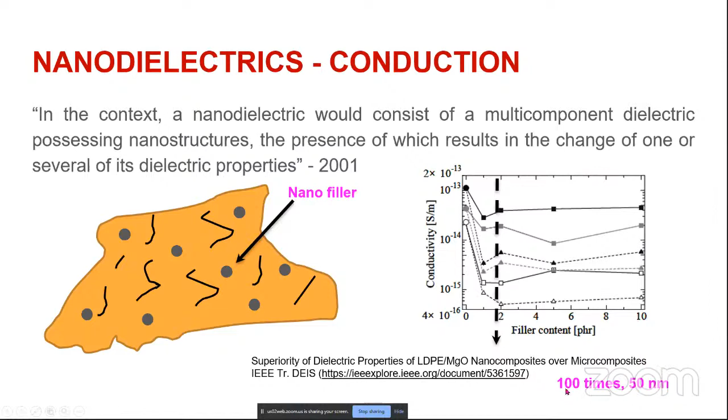As we all know, nanodielectrics have improved performance. For example, conduction is given here. With MgO nano filler of 50 nanometers diameter, around 100 times improvement is observed in the conductivity.

Also, as per the breakdown, around 10 times improvement is observed in the breakdown. Of course, the relation, 100 times in conductivity, 10 times in breakdown, is as per the thermal breakdown mechanism. In DC, the mechanism of breakdown is believed to be thermal in nature.

So both of these are initial performances, meaning when we are developing a nano material, it's not long-term performance. Initially, when we develop the nanocomposite, on that day, during that time, the performance has shown improvement in conduction and also in breakdown. Apart from these, several other properties improved with the nanofiller.

Tree inception voltage, impulse breakdown strength, partial discharge inception — but all these performances or improvements in properties are initial, meaning not after aging. So how it ages is very, very important, because if it ages faster... for example, this is the initial performance, so at time t equal to 0, nano dielectric is having higher breakdown voltage.

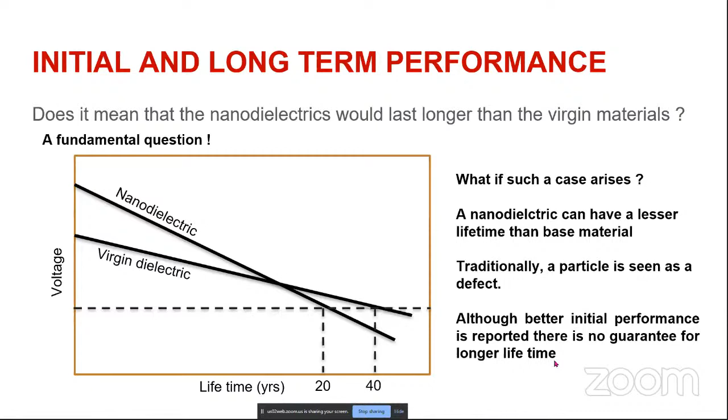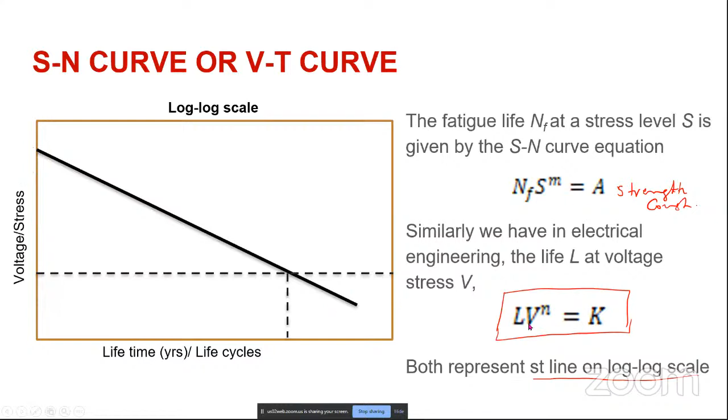Similarly, we have the electric VT characteristic, exactly similar. Both represent a straight line on a log-log scale. All engineers working in high voltage or dielectrics are expected to know this already. So here, this is the operating stress. At operating stress, we expect a longer life, minimum 20 to 30 years. This is the initial stress at which the breakdown strength is normally high, and this curve indicates LV to the power of n equals K, or NF into S to the power of M equals A.

So conventionally, how do we find this curve experimentally? We have long-term aging experiments. Traditionally we have to apply a particular voltage level V1, and it should not be too high.

What happens if it is high? In the initial period, the slope need not actually reflect the actual aging at operating stress level. Therefore, normally we have to decide a stress which is lesser than the initial breakdown voltage. But at a particular voltage V1, it's very difficult to decide which level we have to conduct this test at.

If the stress is very low, on this logarithmic scale, the times will be very huge. Some of the samples may not break at all. My experience also shows that it is very critical to decide at which field we will conduct this constant voltage test.

So here a particular constant voltage V1 is applied, and the test is continued for several samples. We can conduct it simultaneously also, but there are issues when we conduct simultaneously, because breakdown in one sample may initiate due to overvoltage during that breakdown.

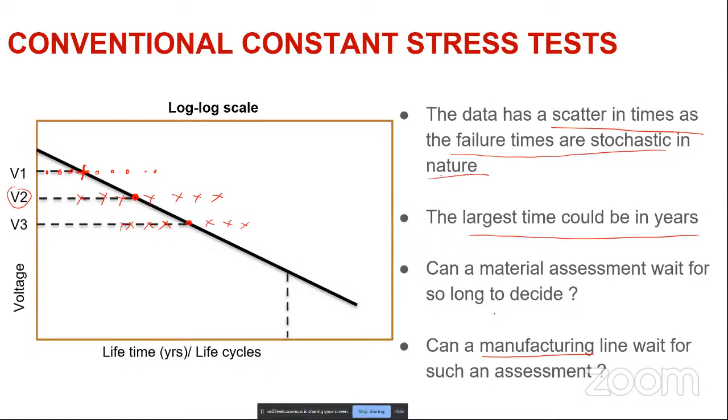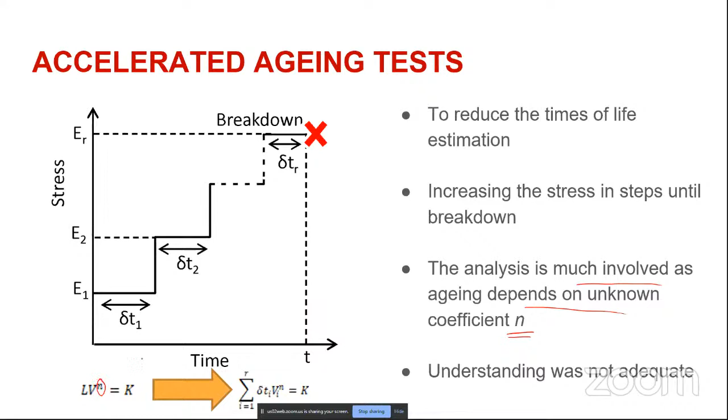So the main target is to estimate this coefficient n, which decides the aging characteristic. So then, how do we do it?

Conventionally, damage is defined in mechanical engineering as per Miner's linear damage accumulation rule, or Palmgren-Miner's rule. The fatigue damage accumulation D is expressed as D equals N-naught divided by NF, where N-naught is the number of cycles elapsed until that particular point of time, and NF is the life under that stress — the number of cycles for complete life under that stress. This precisely represents a relative elapsed life, defined as damage because the stress at which it occurs is not included. Each stress will have a different number of cycles, NFi — for example, if multiple stresses are applied, NFi differs for each stress. So what D gives in this definition is relative elapsed life, disregarding the stress involved — in other words, it's per unit elapsed life with units of time. This is the traditional or conventional definition of damage in mechanical engineering.

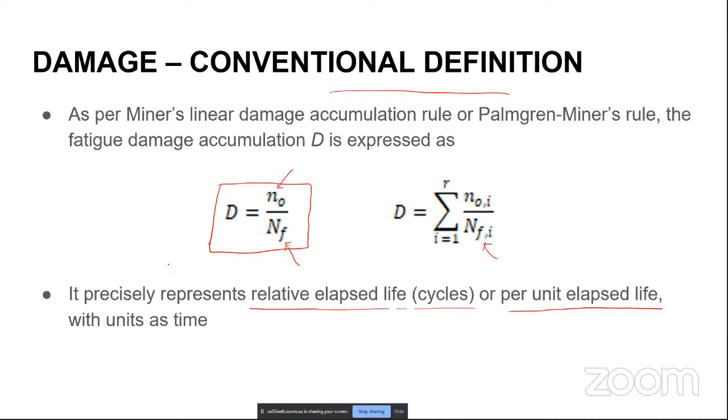Now, a similar definition can be applied in electrical engineering, but what we did is a little different. Damage is redefined here — it is reasonable to assume that damage is a function not only of the time of application of a stress, but also of the magnitude of the stress.

Damage is proportional to N naught, the number of cycles it is stressed, and the stress S to the power of m. So damage is defined as D equals N naught S to the power of m by A, where A is the strength constant.

So what is this actually? Instead of elapsed life, this is per unit elapsed strength. Instead of per unit elapsed life, it is per unit elapsed strength. Even further simplification is possible because A is a constant for a given material, so we can ignore dividing by this coefficient or this number. So damage now represents elapsed strength rather than elapsed life.

So alternately, if we ignore A, we can even define D as N naught S to the power of m. The electrical counterpart, we defined it as DC is sum of delta Ti into Vi to the power of n.

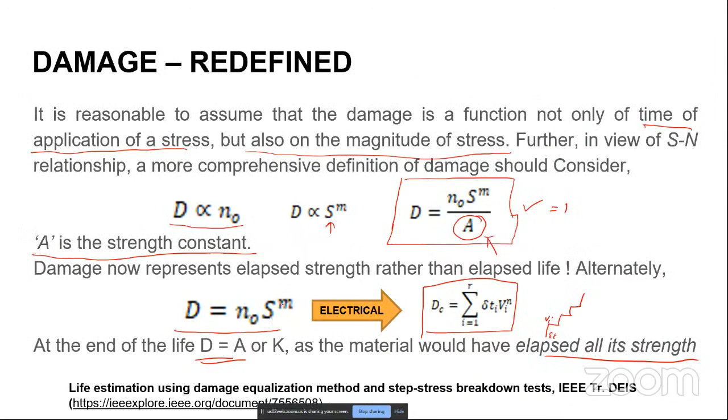So this is how D equals N naught S to the power of m. It is also important to note that all the samples do not register the same damage when they break. Therefore, if we allow damage to be a random variable, then all the samples need not accumulate the same equal amount of damage when they fail.

But actually there will be some representative number. It doesn't mean that damage is irrelevant. Yes, damage has relevance, but it is statistical in nature. This is very important to understand: all damages are not the same, all samples will not accumulate the same damage when they fail. But there is a statistical number which corresponds to a particular sample, that is 63.2 percentage, meaning 63.2 percentage of samples will fail at a particular damage. So that is the 63.2 percentage damage.

So like that, we do have a number. This is what is important: here we treated damage as a random variable. So each sample would break after accumulating its own damage based on its own voltage time history, and all such damages will follow a probabilistic or statistical distribution.

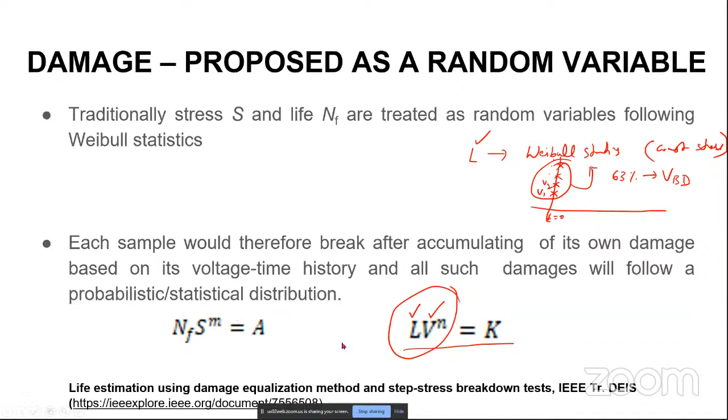This has been proposed in our paper actually. So of course, various tests exist. Our damage equalization method does not require any step stress tests, it can be applied to any kind of test. But we propose it for step stress tests also, keeping in mind that it is very quick in nature. We can assess the material in a very short time. That's very important.

So here various tests and their significance is discussed. Accelerated life testing using constant stress is usually cumbersome, as the times to breakdown are normally very large. Consequently, accurate and usable data is difficult to obtain. On the other hand, step stress techniques ensure faster availability of data owing to much reduced failure times.

As I discussed earlier, since each sample has its own damage or its own life curve, here the statistical distribution is given interpreted with different VT characteristics. This is the VT characteristics of the different samples. It is a spread, not a single line, that's what we recognize here. So these are life curves.

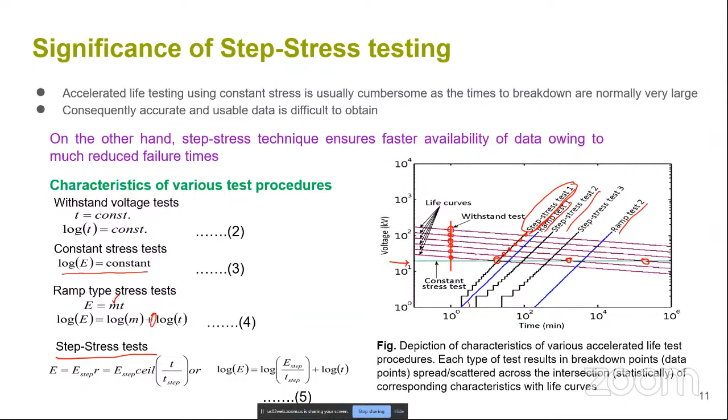Various tests are given here. For example, if I conduct a test using this step stress test 1 with a particular step size, then I will end up with sample breakdowns at these levels because of the statistical distribution of damage or statistical distribution of VT characteristics themselves. So this is again depicted in the damage versus time characteristics here.

So this is the spread of damage, different samples will break at different damages. But this spread is constant with time also, whatever time it is, the same accumulation of damage should happen. So the damage is not a single line, this is of course a representative line drawn here, say 63.2% of damage. So if we conduct the different stress tests, they're indicated on this, showing how they will accumulate damage.

So the different kinds and levels of damages are shown here. The 63% damage will correspond to a representative value. This is how it works, but the damages you see are...

parallel straight lines, parallel to the time axis, because they should be independent. Whenever breakdown occurs, they should have accumulated the same amount of damage. So irrespective of the nature of the test we do, the moment a sample acquires a particular damage, and if its accumulated damage crosses the damage at which breakdown occurs, then the sample must fail.

If you conduct a step test using this, it will fail here. Or a ramp test like this, it will fail here, but the same amount of damage would have accumulated. So on the damage scale, it should have attained the same damage. Irrespective of the time of failure, if it accumulates the same amount of damage, it must fail.

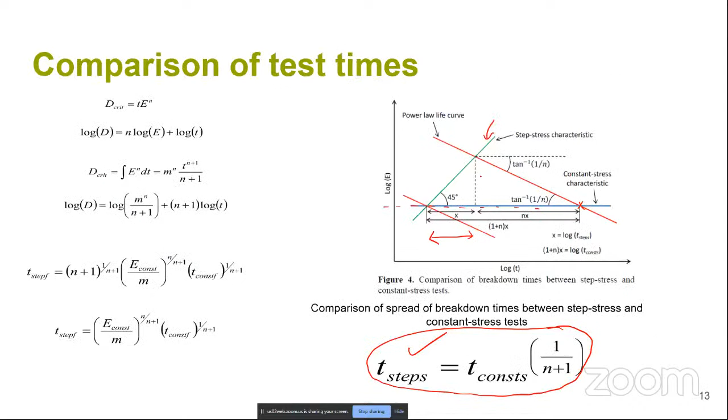Of course, the damage equalization method combined with the step stress test requires at least two types of tests. For example, here this is the damage characteristic. To equate the damage, at least two types of stress tests have to be conducted, any two types. Otherwise we will not get a line like this.

For example, we conduct a step stress test here and another step stress test here, or a ramp test, and then plot a line for these two data sets. Then we get an equalization, meaning the damage should be equal irrespective of the type of test. That's what is being proposed here.

For example, we conducted step test 1 and step test 2, and found two different data sets of damages, and these two damages must be equal. So that equalization gives us the characteristic of the damage. This is what is done in our proposal actually.

Then, why we cannot do this with a single step test type is explained here. For example, you may use any number of samples, but if you use only a particular type of step test profile - say fixed at 1 kV per minute - and conduct any number of samples, you cannot get a life characteristic, because all of them will fall on this single line, say for step stress test 1 only. So if you fit the line, you will get such a characteristic.

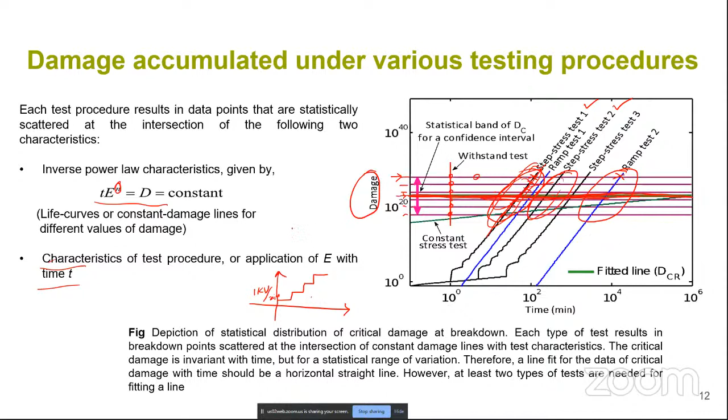So then, if you conduct another, different type of step test with the same step size but change the step size, or change the time per step, then it will give different characteristics, and different statistical distribution of data. And then this data set and this data set, if you equate by fitting a straight line which has zero slope, that's it, simple. Then you get the estimation of n. So that's what is proposed in this work.

So here we propose at least two types of tests are needed. For example, this is one step size, this is another step size, or step duration you change, and step size you may keep 1 kV. Because this vertical step gives us the vertical resolution, meaning how much is the breakdown strength at what resolution, meaning what is the minimum resolution of your experiments. And this horizontal, this time step, only delays the experiment.

So what we did was keep that 1 kV constant and then increase the step. Of course, irrespective of that, if there is any difference in the characteristics, you will definitely get damage. You can use the damage equalization method and calculate the value of n. Equalization is very simple actually, it does not require very tedious statistical methods. Simply fit a line for different step tests, then find out the value of n. That's very, very simple.

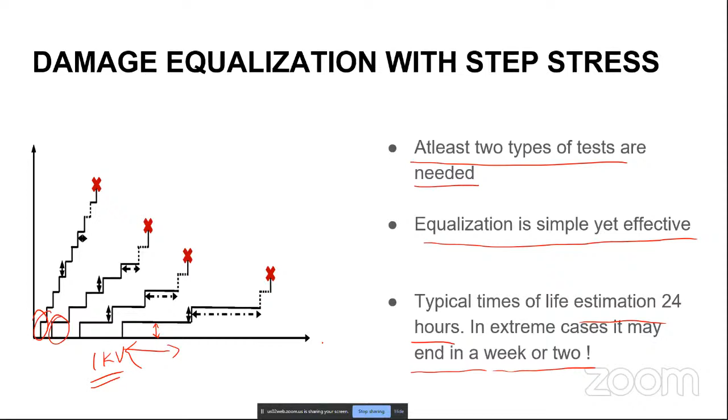And the typical time for life estimation is 24 hours if you conduct the experiments continuously. So in extreme cases, it may end in a week or two. That's the advantage of using step stress tests in combination with the damage equalization method.

So this is the flow chart: read the step durations of stresses. Of course, a very generalized method is given here, even E2, E3, and then sample till breakdown—these are only known values. Set the iteration number j equal to 1, and the value of index n, nj. Actually, n is iteratively found.

The damage estimation has a damage equation: delta t into V to the power of n. This n is unknown. So this n is obtained in such a way that the damages of different tests can be fit to a straight line, at which the slope of this straight line is 0, meaning horizontal to the time axis. Then that corresponding value of n is decided as the value of n for that sample. This value of n is known as the endurance coefficient. It's very, very important for dielectric people, for high voltage people.

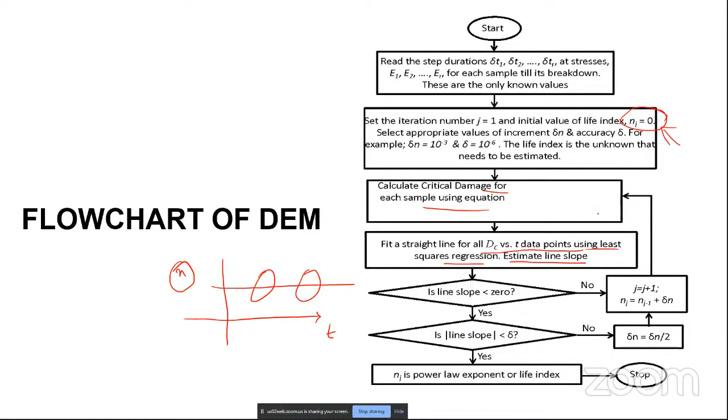So calculate damage first: we start from n equal to 0 and calculate damages for each sample using the damage equation, whatever the damage definition given initially, and fit a straight line for all damage DC versus T data points using least square regression—nothing else, just very simple—and estimate the line slope. Go on estimating the line slope for different values of n, and whenever it becomes 0, just stop the iterations, and that corresponding n value is the endurance coefficient. So this is very simple.

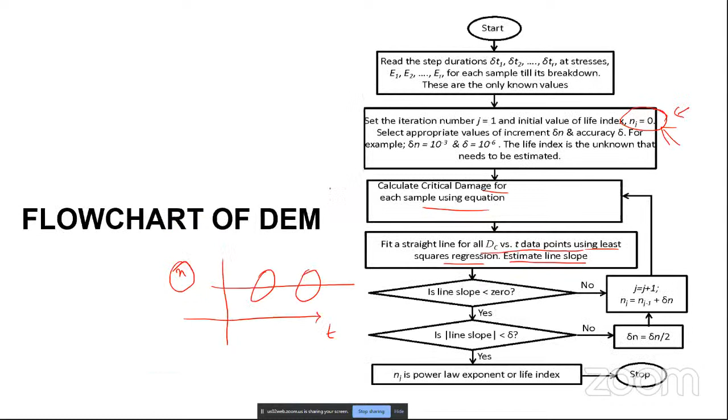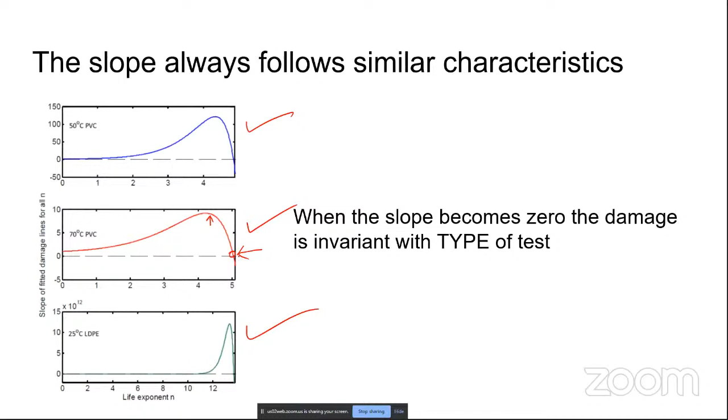Actually, the slope calculated in this method always follows such characteristics. We have done this for many samples and many different dielectric materials, but all of them follow this pattern. It never becomes negative until it goes like this and then increases suddenly, and here there is always a peak, and then it becomes 0. So this value is our requirement. When the slope becomes 0, the damage is invariant with type of test. That's where we have taken the value of n.

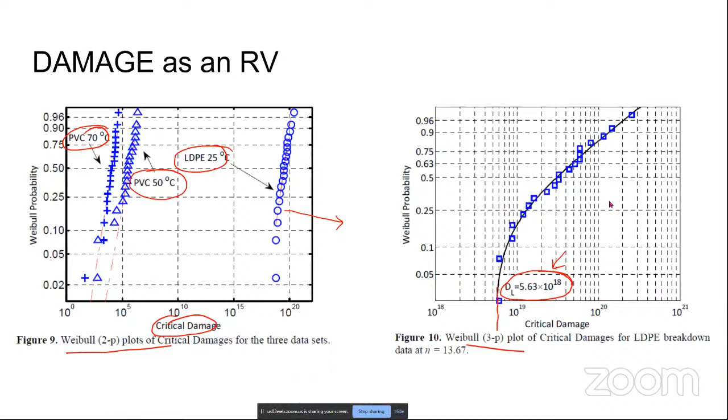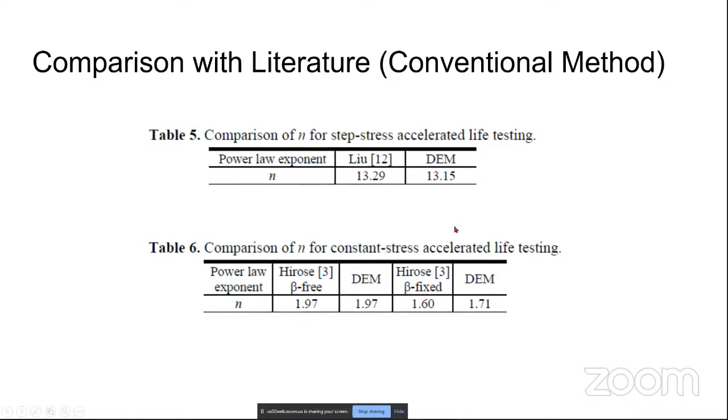This was the result initially when we proposed this method. After that, we have been successfully using it for several samples, and practically expected values are being obtained. Another statistical feature of this method is also being submitted under review, and the paper is currently under review. So the method actually worked successfully.

Test results confirmed well with long-term test results using the maximum likelihood method. So with these results, life assessment became a quick characterization technique for the assessment of materials, especially when developing a new material, where test results are of utmost importance.

So using step stress tests, if we conduct a single step stress type of test, we can never estimate the endurance coefficient. But if we have a minimum of two different types of tests conducted, the data can be used to estimate N with a very simple technique, that is linear least squares regression, by equating the damages of different tests. So this is what we have done.

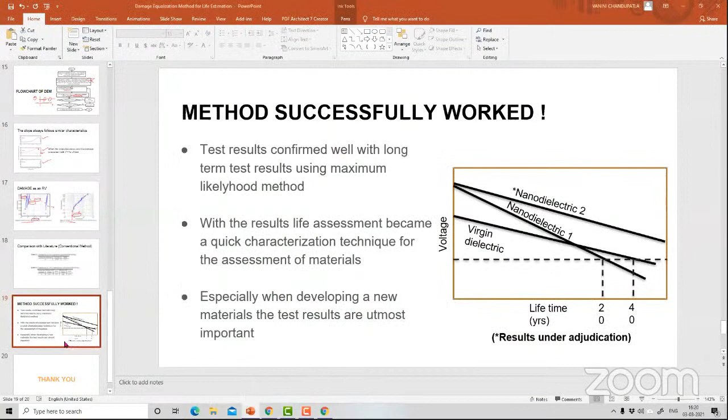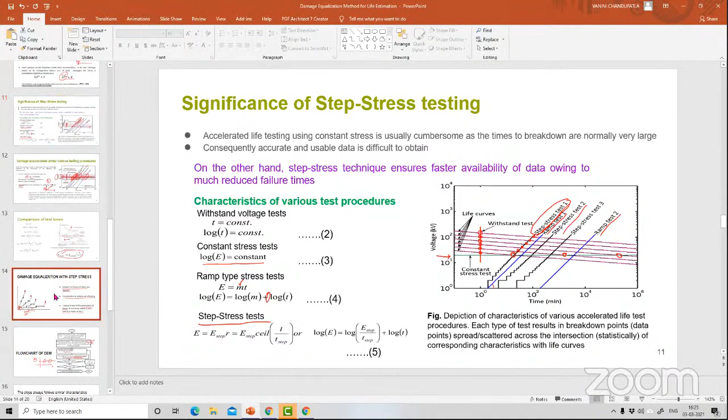Okay, here in this graph, you have said that you have fixed the voltage, step size for the voltage as 1 kV, and you are increasing the step size for this time. Step time I am increasing. Yes, step time I am increasing. See, 1 kV per minute, 1 kV per hour, 1 kV per 2 hours, 1 kV per 3 hours, something like that we have done.

Okay, but during this maybe the breakdown of the sample may occur. Then again, you will do the same exercise. During this, see, each time a sample will fail, obviously. Yeah, okay, each time a sample will fail. So definitely, this is like I am doing every time on a fresh sample. But yes, okay, on a fresh sample. If you do on the same sample, of course, you have to continue

the step from wherever it has broken. Yes, okay, that is very important. You have to continue because damage is already accumulated, some damage is accumulated. You have to continue from wherever you have broken. So from there you have to continue. So exactly, it will be difficult actually. So how to suddenly go to that voltage level and continue?

That's why each time we have to apply a fresh sample, one single sample at a time. That is what is done. Of course, it is not mandatory to do like that. If we have a software which can drive a DC source or AC source, suddenly if you can go to that level and then continue the experiment, that is well and good, not a problem.